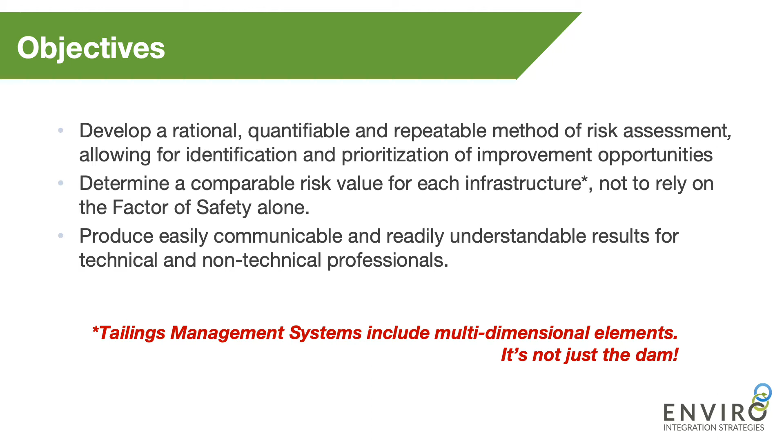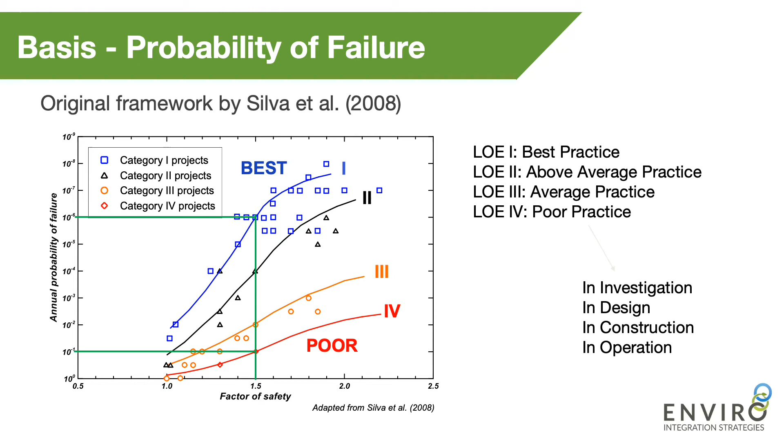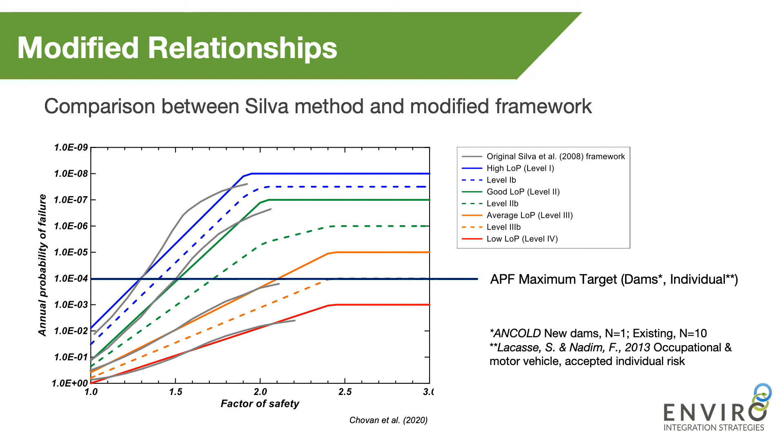So these are some of the smaller adjustments we made. You can see the differences between Silva's work and ours. We straightened the lines. We used the same data set to do that. We added some interim lines in between, that's pure interpolation. And we also capped those lines at minimum probabilities of failure for each level. The thing I want you to take notice of is we also added a target line for this exercise in alignment with some of the standards that are out there, including ANCOLD for new dams. It is also the level at which most historic tailings failures have occurred, at higher probabilities of failure than 1 in 10,000.

Some of the larger changes we made were to do with the number of criteria. So we nearly doubled the number of criteria, particularly for the operation and monitoring segment, where we added a lot more aspects in regard to the life cycle and changes over that duration for tailings infrastructure. So there's a lot more on governance and management systems, monitoring programs, and actually the performance of the infrastructure as well.

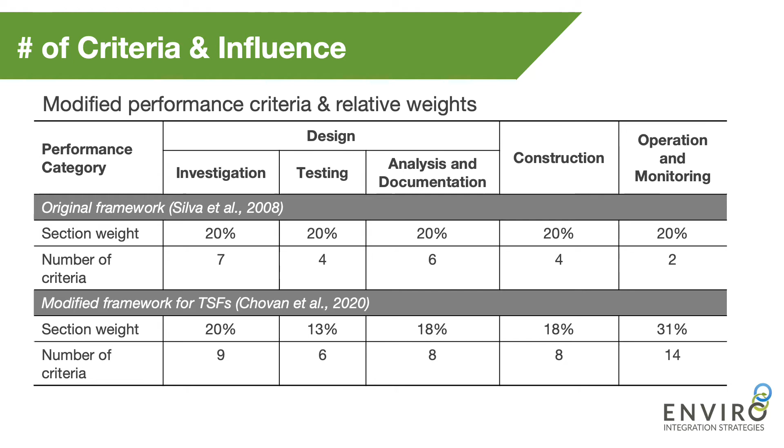The other major thing that we changed was, rather than have each category equally weighted, we actually made each criterion equally weighted, and then the section weight or the category weight becomes a function of the number of criteria within those segments. And you can see as a result that the operation and monitoring category has a bit higher weight than the others all told. But this is a good thing because it is more dependent on the full life cycle of the infrastructure, and because we have extended durations of these types of infrastructure.

With this modified criteria list, we included explicit definitions for each level of practice for every single criterion. Here we rate each and every single criterion with a specific level based on the definition, allowing for a much more repeatable process and less variability between results of different readers.

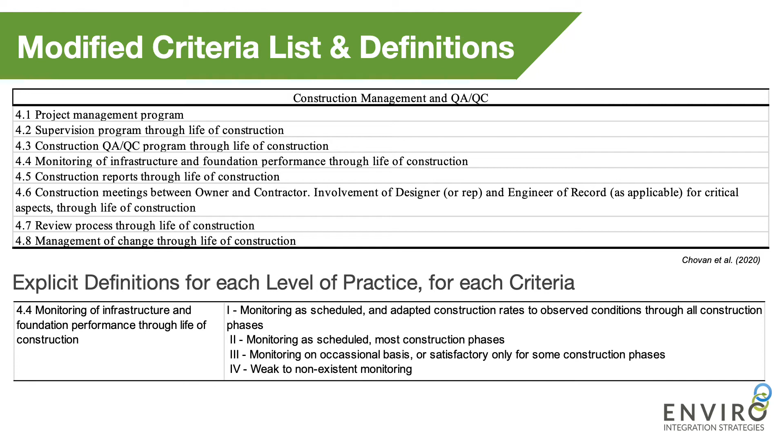Now, going beyond Silva's work, we also introduced the risk classification, as I mentioned. Now, this is just a quick look at a traditional 5x5 chart, which most companies have a version of, where they classify their tolerance levels between the very high, medium, and low risk. It's a combination of the probability rating against the consequence rating.

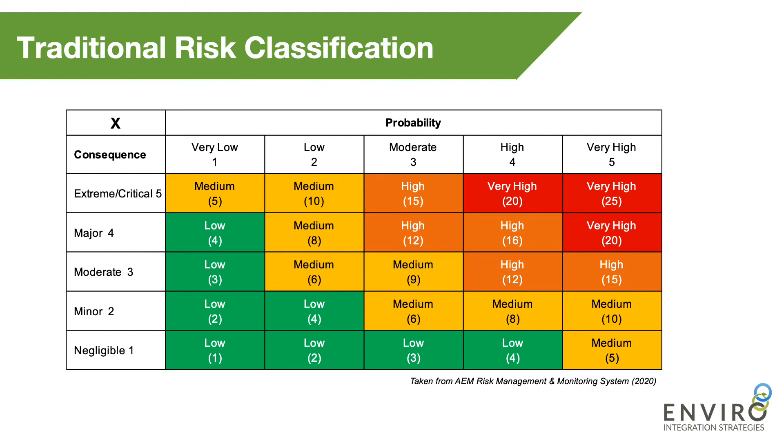Now, this chart is a little bit more difficult to use with a complex infrastructure like tailings facilities because we have a lot of extreme and major consequences combined with very low and low probabilities of failure. And so we have, as a result, a lot of infrastructure that are rated as low to medium risk, and it is very difficult to differentiate what to work on as a priority. So we took this information and we flipped it into a more useful chart where we assign a range of probability of failure to each of the probability ratings of 1 through 5.

And you can see the numbers on the grid in the chart are just those pure calculations between probability rating and consequence rating, and the dividing lines between the sections are generally where the transitions fell in the same 5x5 grid. And so you can see how we established the categories of risk on this chart.

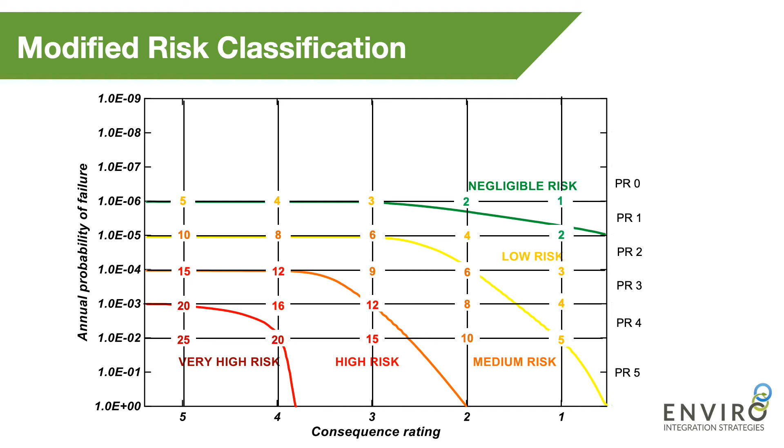Now, our general process was fairly straightforward. First of all, with the size of some of these infrastructure, we needed to make sure we were selecting appropriate cross sections to evaluate. In some cases, it was one if the site was fairly homogeneous, but if we had longer infrastructure with variable ground conditions along the way, we would evaluate more than one cross section.

With those cross sections, we would select appropriate factors of safety based on all the stability analyses run for each section. We'd evaluate the criteria for those sections to calculate our level of practice score and determine the probability of failure using those new modified relationships.

Separate from this evaluation, the consequence ratings were established based on dam breach analyses and other studies. So we would use those results and combine the probability of failure with the consequence to achieve our level of risk. Taking all of these results as a whole, we took them back to the sites to review with the responsible persons and management on site, giving them an opportunity to provide additional information that may have been missing during our original evaluation process, and allow an update as that was feasible.

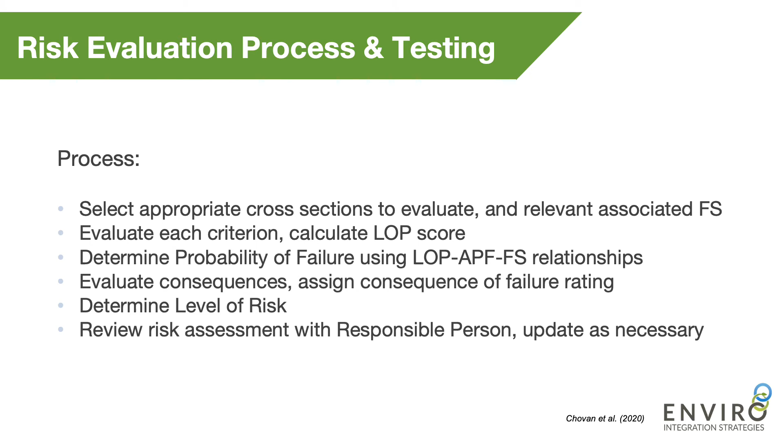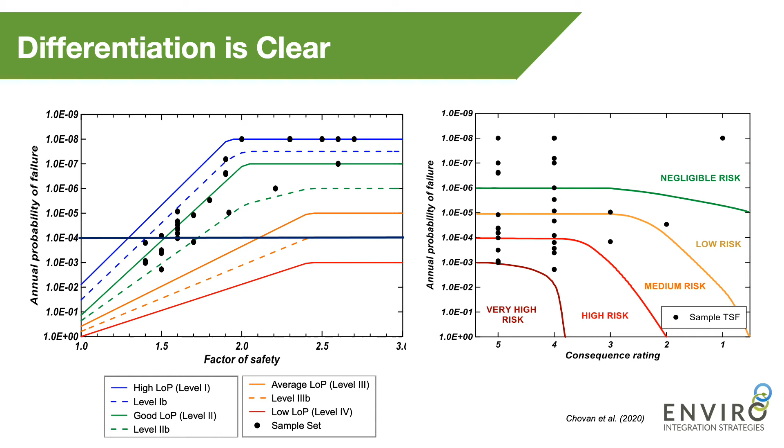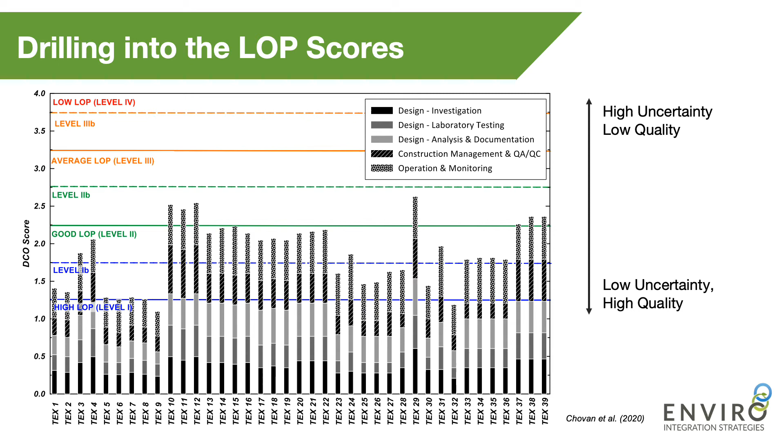And so, for example, if we look at, say, TEX29, which is here quite a long length, we can see the bottom 3 categories, which all have to do with the design stages, the investigation, the testing, the analysis. And that is a much lower quality or higher uncertainties than, say, one over here, TEX9. So there's a lot of potential to look into these categories to see what additional work we can do to improve that score.

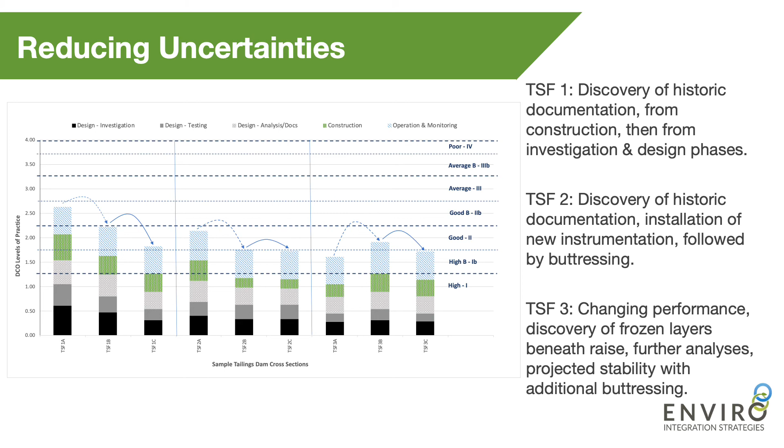Okay, now we took some additional information from further investigations and re-updated the design and analysis, leaving some uncertainties there, but in better shape than the second bar. If we move to the last set of charts here, you can see how this looks on the other graphs. So if we look at the blue bars here for now, you can see just by changing the level of practice scores, how that just simply moves us up in the score for the probability of failure.

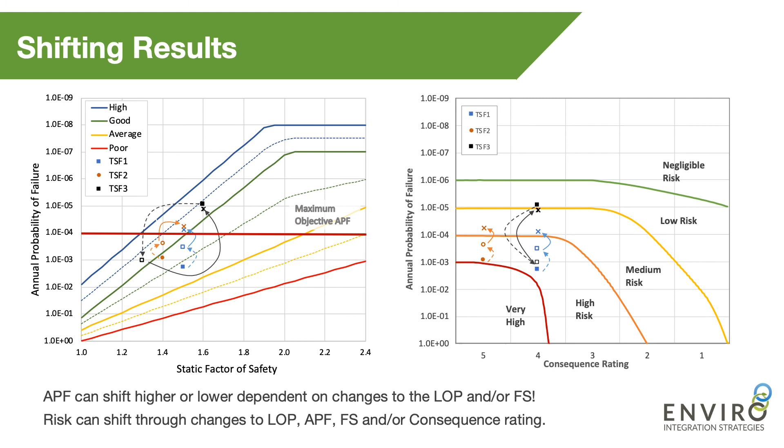So just want to close with some conclusions: we did produce and validate a risk-based evaluation tool that was derived and based on the well-recognized works of Silva, Lambe, and Marr. We did more explicitly integrate the evaluation of governance management systems and the performance of infrastructures to complement what Silva had done earlier on. With some revisions to some of the criteria, we have also tested this and utilized it for assessing water management infrastructure and heap leach facilities as well. So we know it is applicable for other types of critical infrastructure.

We found that this process we took in terms of reviewing with the sites after we had evaluated everything, and the requirement to utilize documentation for all of the evaluations, allowed for a very rapid implementation and a provision of an audit trail for the assessment. Everything is now compiled and readily available for reference in one place. Because we introduced the requirement for needing everything to be based on available documentation and not just personal perspectives, and also having those very specific definitions for each level with each criteria, it helped to remove personal subjectivity, which helps us generate reliable and repeatable results.